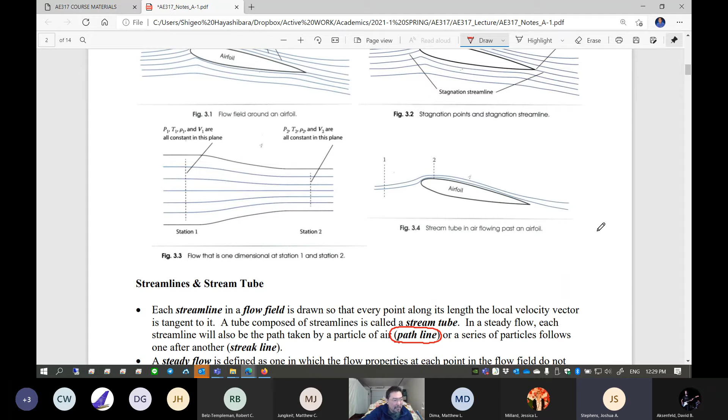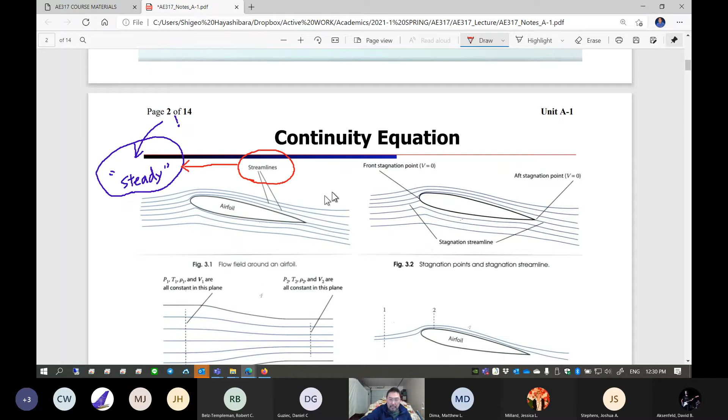A streamline is tangent to the flow field. Physically speaking, that's correct. So this is—I hope you're not looking at the notes. Okay, where is it? Did I say that? Tangent.

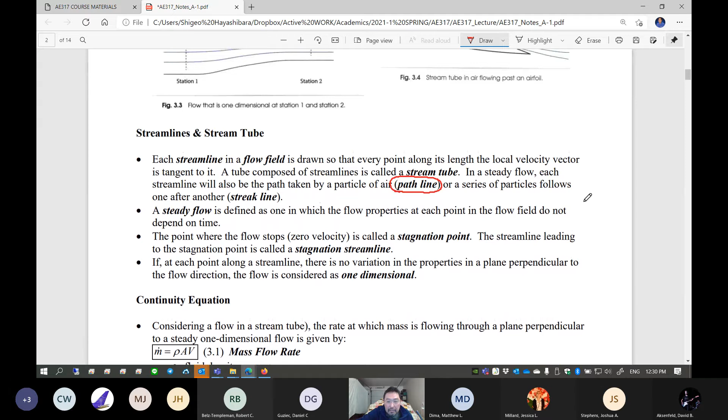Is the note saying something like that? I don't know, anyway—first bullet point. At every point along its length, the local velocity vector is tangent to it. What does that mean? That means if you choose this path, at any location, the velocity direction is tangent to the path. I don't know the magnitude, but I know at least the direction of the velocity, which is tangent to the path. That's a very good definition, physically speaking.

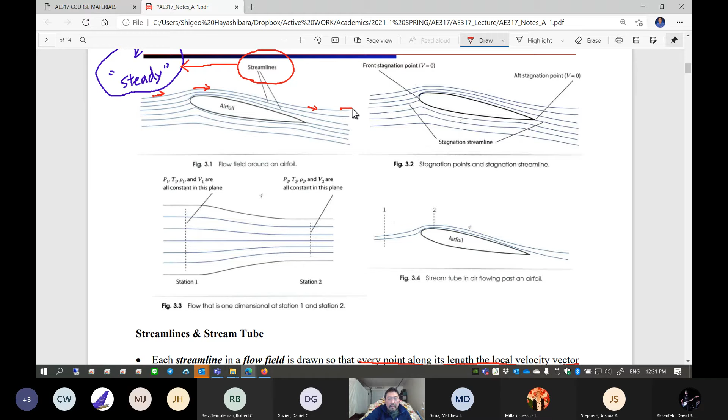Also, another definition is quite important. I'm going to change the color here. It is a—streamline is what? Streamline is, okay, it's not saying... streamline is actually a purely mathematical concept.

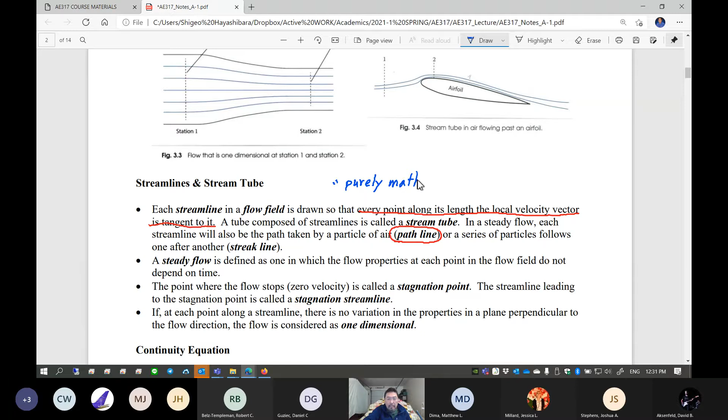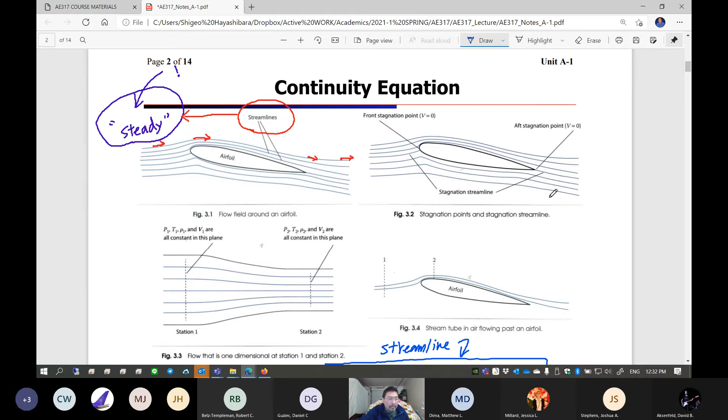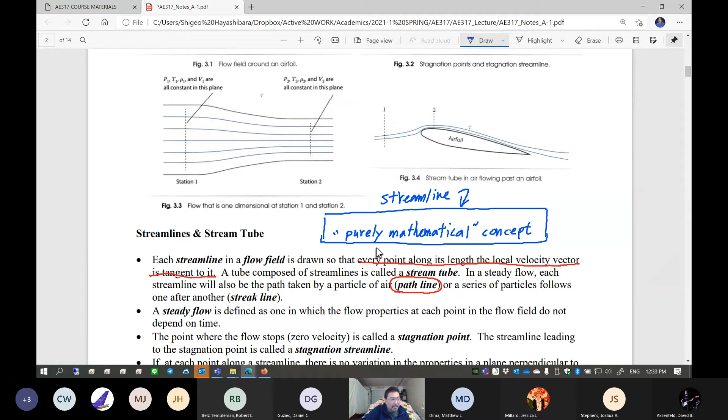This is actually the most important out of all the definitions—that's the streamline. So streamline is actually... you can basically say that it's physical. In other words, you can visualize the flow field because this is the line specifying the tangential direction of the velocity field present in the flow field. You can also visualize it by injecting smoke particles into the flow field—that particle takes a path, which is called the path line. If you continuously inject particles at the same location, the numbers of particles following one after another create a streak, called the streak line—that's essentially a smoke wind tunnel. So it's a flow visualization, something physical, but at the same time purely mathematical. That's why you can now develop an equation for a flow field. Without this streamline concept, you'd have zero equations available for fluid mechanics. In other words, wind tunnels and flow visualization were the only way to analyze flow fields back in the day. So you have to realize the importance of the mathematical nature of the streamline concept.

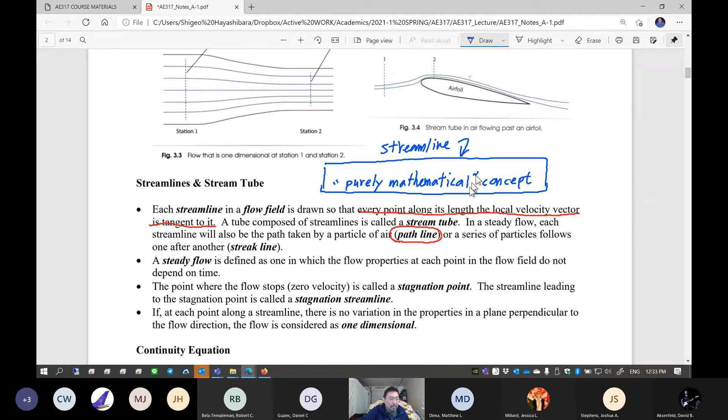Having said that, did I mention streak line? Streak line is essentially... a path line is a single particle's path. Streak line is this path of multiple particles released at the same location, one particle following one after another, ended up having a line over a streak. I'm using the digital ink - this is a streak of small tiny dots, but it looks like a continuous line. It's called streak line, a streak of ink, for example.

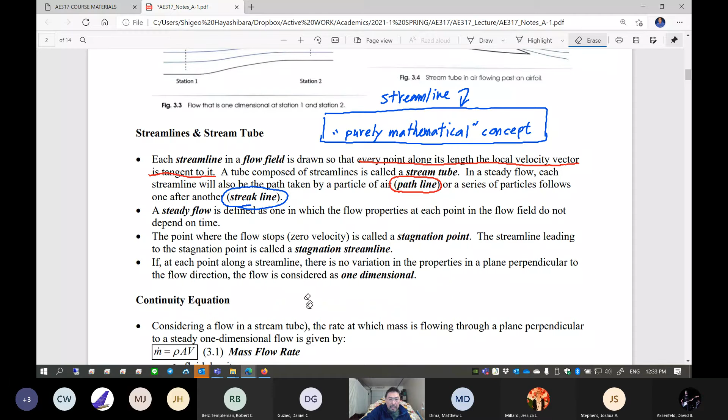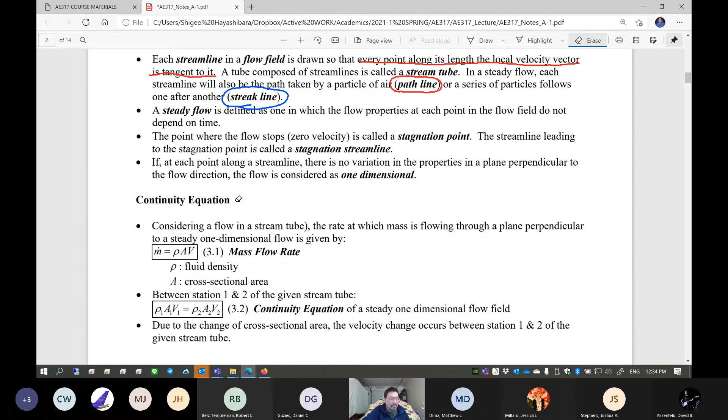Now, because of... well, thank God we have streamline. That's why we can apply equation. Okay, so let's move on.

So there are a few equations we developed back in old days fluid mechanics. One of them is continuity equation, coming all the way from conservation of mass. Do you remember the original governing equation? Conservation of mass. So just because continuity equation is given here, this is not the governing equation. This is like a simplified equation coming all the way from the governing equation of conservation of mass.

So you had to apply tons of assumptions or simplification constraints to simplify the equation. This is something called the continuity equation. But if you pick it up as is and plug and chug, sometimes you are in big trouble, because this equation is so specific - there are lots of constraints attached to it. So could somebody actually point out, okay, where is this equation coming from?

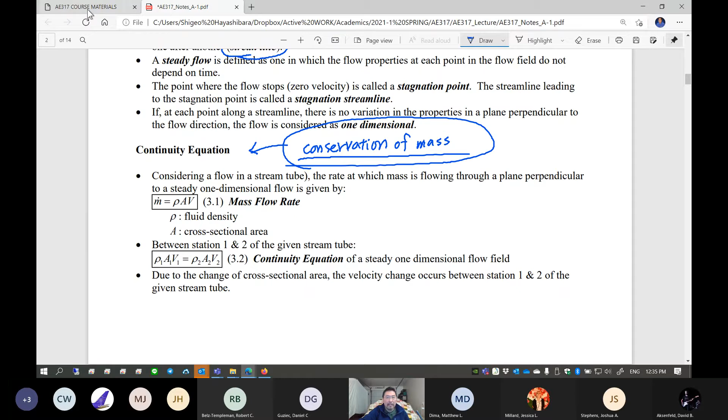Let's go back to the home page. This is AE317 course materials. Oftentimes you probably want to go back to either fluid mechanics or aerodynamics. So now my question is, where did you get this equation? Somebody please - Reynolds transport theorem. Okay, so which one?

Let's take a look at somewhere. So you want to go all the way back to fluids, or you want to take a look at the aero notes - either way is fine. I think it was unit D of fluid or unit A of aero, either way it's the same thing. But let's take a look at aero unit A3.

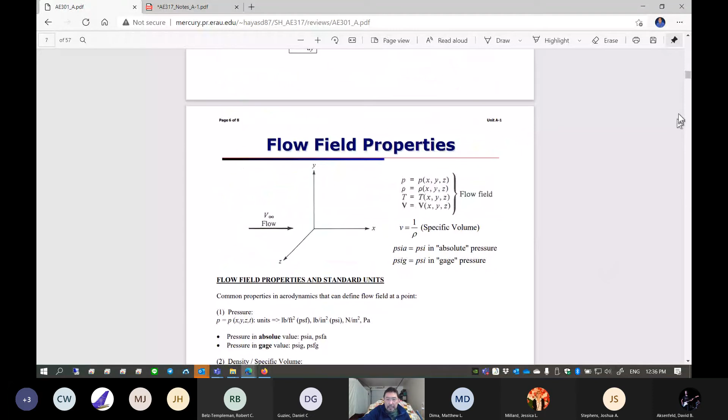Especially for those who didn't take my aero class, this is a good time to look at where you can find stuff in aerodynamics notes. So if you go back to aerodynamics note unit A3, this is the continuity principle, page 1 of unit A3 note, continuity principle.

Take a close look at it. This is the original governing equation of fluid mechanics. This is the same equation, just a different style. This is the Munson, Young, Okiishi, Iowa State University mechanical professor style of equation. This is the John D. Anderson, professor of University of Maryland style of equation.

By the way, Professor John D. Anderson is a god of aerodynamics. No one can go against him. He's the one who pretty much makes the rules of aerodynamics in this country. So this is the governing equation, continuity.

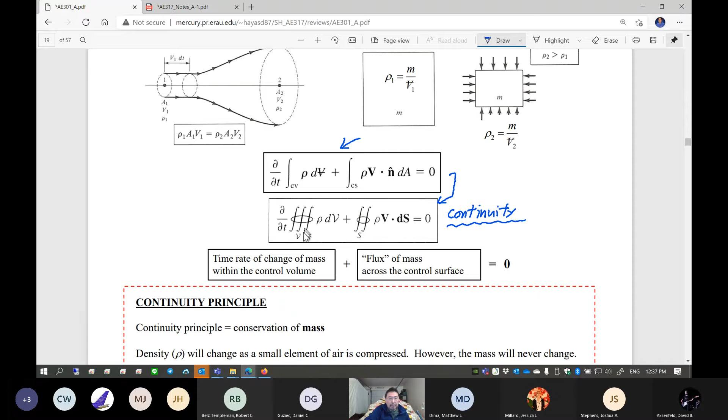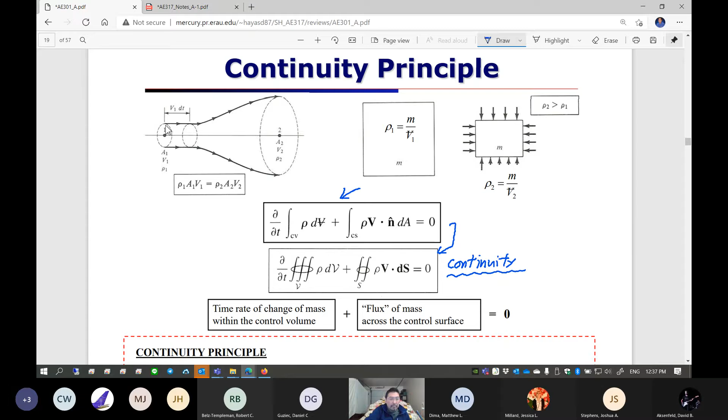So this governing equation basically includes everything. This portion is the time rate of change of mass within the control volume, if you define the control volume in the flow field - let's say if this is a control volume. If you define the control volume, you're going to define a control surface, the surface where you allow fluid flow through it. In this case, control surface, 2 of them.

So that is actually the right-hand side - this is how much flux of mass flows through those 2 control surfaces. Those 2 added together must be equal to 0, called the continuity principle or governing equation of continuity. Do you remember those things? I hope so. Let's just go back here. So how did you get this equation?

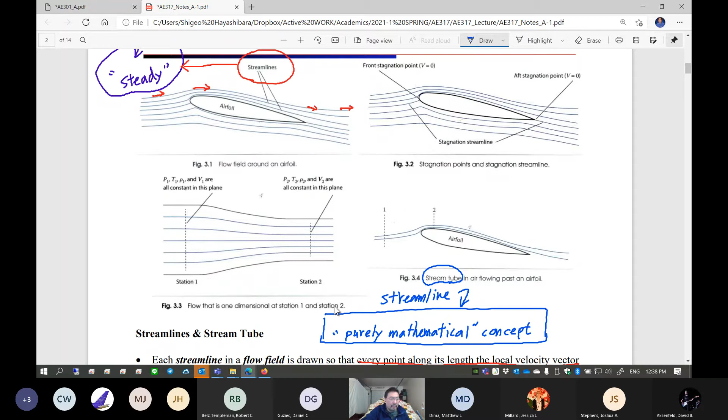That's important. You are going to basically define a streamline in the flow field, just like that. Then at the same time you can actually create a tube using streamline, it's called a stream tube - a tube created by streamline. Similar to this thing, this is a stream tube, a tube created by streamline.

So because of the definition of the streamline, velocity is always tangent to the line called streamline, so there's no flow going across it. This is like a solid wall, acting like a solid wall - there's no flow going across it. The only surfaces that actually allow the flow to come in and go out are those control surfaces.

Now you are going to apply the equation here, then come up with that equation of continuity. So what are those assumptions? We have to probably list all of those assumptions for this equation. So what is the very first assumption for this equation, coming all the way from the conservation of mass governing equation?

Steady flow - yes, exactly, that's what I wanted to hear. Second assumption. By the way, steady flow is completely dropping off this term, right?

This is zero steady. Okay, so what's next? Incompressible - incompressible is not in here actually. Inviscid, incompressible, a little too fast, a little too early. It's gonna show up, but not here.

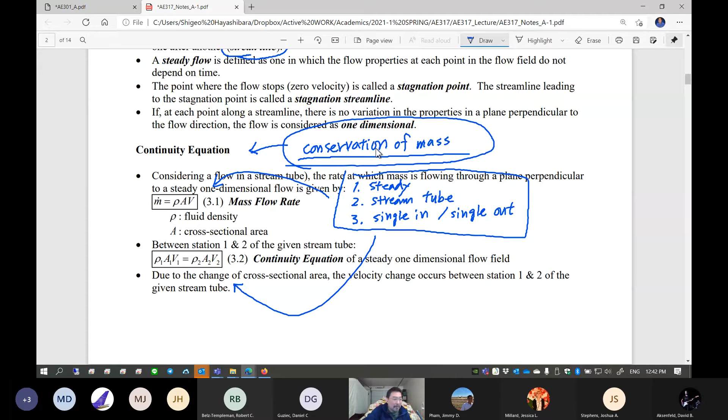So let's take a look at the very simple exercise here, okay? You're gonna probably rough it out, but here's the catch. I'm planning the very first quiz, not the homework. Homework is gonna come up later, but I'm thinking of the very first quiz, just the very first stumbling block to challenge you off of this example problem. So just pay attention.

And also, I hope you have a calculator because I don't want to calculate by myself. So I'm going to wait until your calculation result. Okay, so example A-1-1, next page.

Okay, so this is again stream tube, and let's assume this is something called one-dimensional flow. One-dimensional stream tube means that across this station one cross section, pressure, temperature, density, and velocity are all constant across this cross section station one - that's called 1D. And also pressure, temperature, density, and velocity are all constant across this section two, cross section here, it's 1D. So this is one-dimensional stream tube.

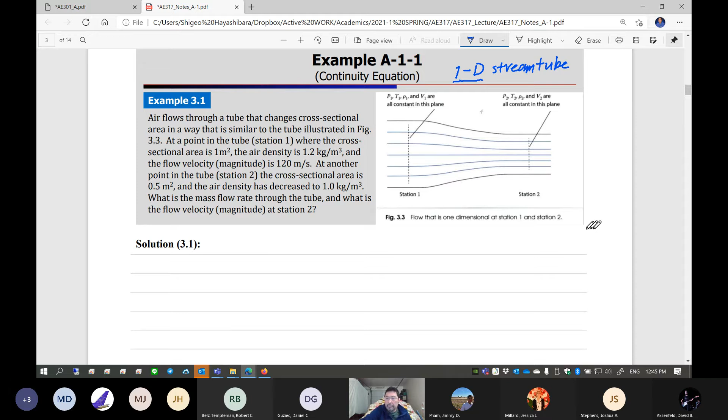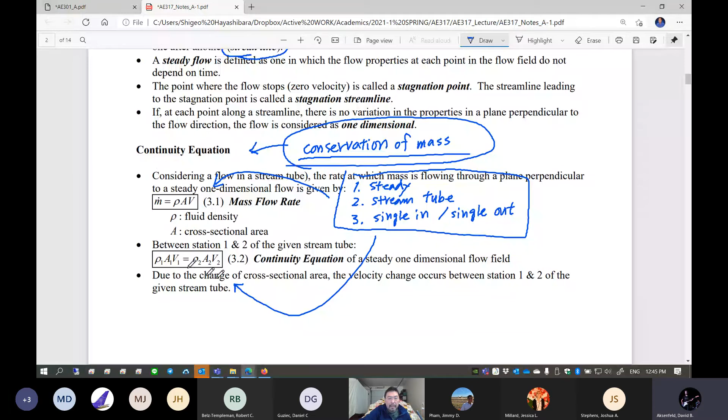Let's just take a look at it. So what equation do you want to pick? Continuity - which one? Equation 3.2. 3.2. Okay, let's pick up equation 3.2.

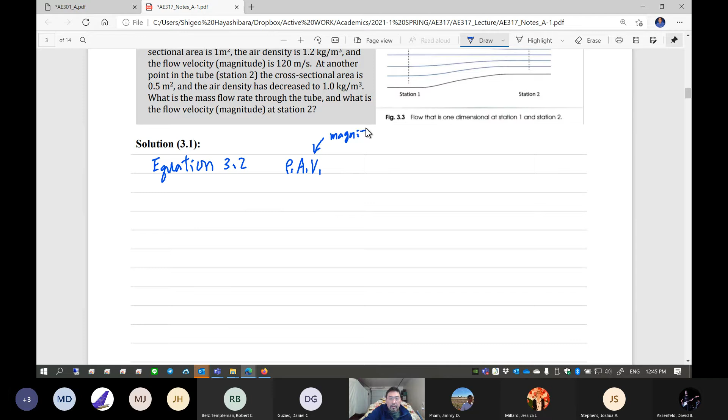So equation 3.2 basically says rho 1, A1, V1 - by the way, V1 this is magnitude, okay? Let me zoom in a little bit more. So density, cross-section area, velocity at station 1 multiplied together, this is actually mass flow rate.

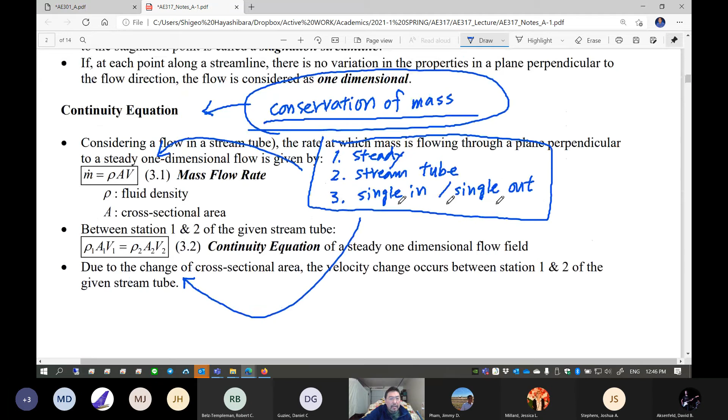Mass flow rate never changes between station 1 and 2 - that's what equation 3.1 says. Equation 3.1 says mass flow rate is constant. So if you apply it between station 1 and 2, this is equation 3.2: rho 1 A1 V1 is equal to rho 2 A2 V2. Once again, velocity magnitude V1 and V2.

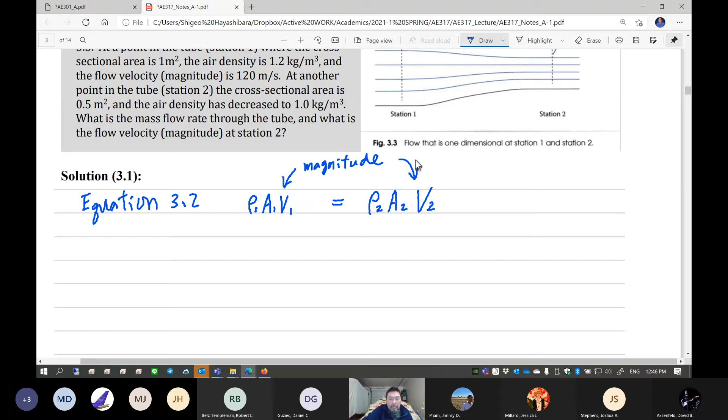So what do we know? Rho 1, density 1, is 1.2 kilogram per cubic meter. Cross-section area A1 is 1 meter square. Velocity V1 - what is velocity V1? Do we know that? 120? Oh, okay.

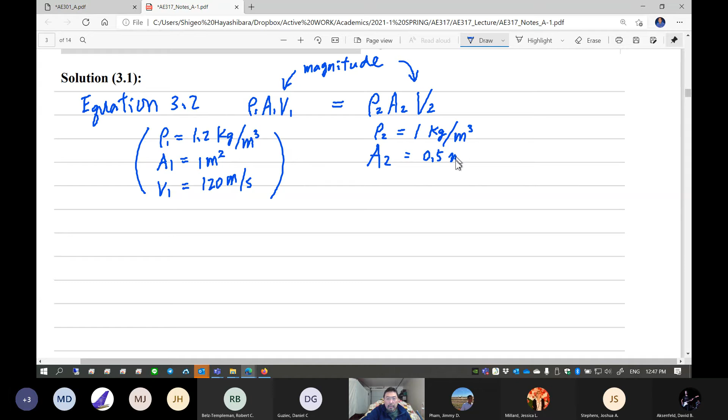Density rho 2 is given as 1 kilogram per cubic meter. Cross-section area A2 is 0.5. V2, what is it?

So obviously you're going to apply this. First of all, let's find out the mass flow rate, which must be constant.

Which means m-dot 1, which is rho 1 A1 V1. M-dot 2, the mass flow rate, is rho 2 A2 V2. So basically equation 3.2 says mass flow rate M1 and mass flow rate M2 are essentially the same thing.

So you can either use the condition of station 1 or condition of station 2 to determine mass flow rate first. Let's use the condition for station 1. So using condition of station 1, mass flow rate m-dot is rho 1 is...

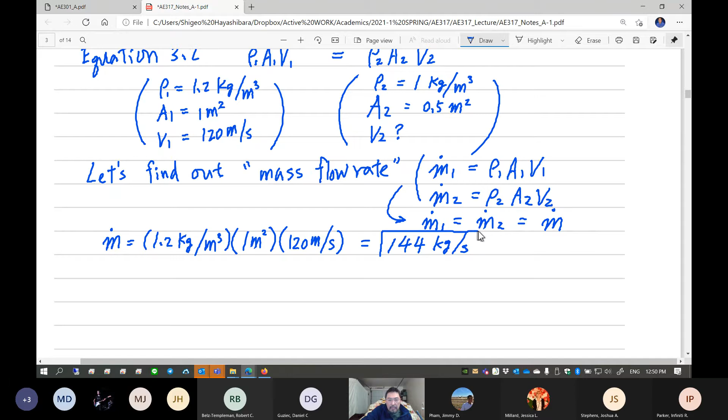So what's the unit? Kilograms per second. That's right. So how much mass is flowing for a given time. So this is the mass flow rate, which is constant between station 1 and station 2.

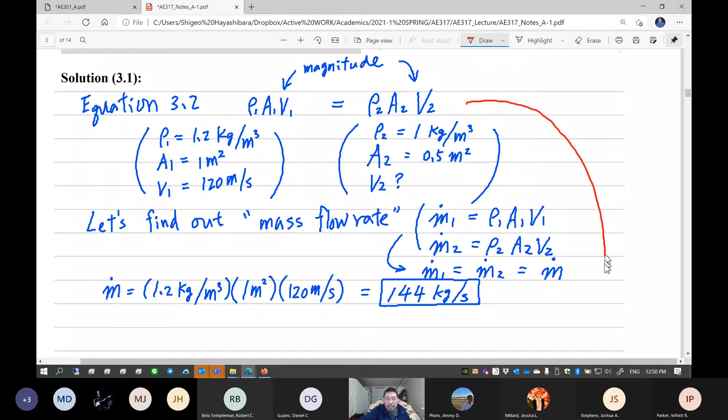Second question, what is the velocity V2? Obviously you're going to pick up the equation from here, then apply it. So...

V2 is equal to V1 multiplied by the ratio of the density, rho 1 over rho 2, multiplied by the ratio of the cross-section area, A1 over A2.

So if V1 is 120 meter per second, density is... wait a minute, that's a dumb thing to do. Let's not do this. Okay, that's a pretty dumb thing to do. So this is, by the way...

rho 1, A1, V1 divided by rho 2, A2. Since the numerator is essentially m-dot, right? So let's use the value here.

So I'm going to pick up this value and plug it right in here, 144 kilogram per second. And density rho 2 is given as 1 kilogram per cubic meter, multiplied by the cross-section area, 0.5 meter square. What is V2?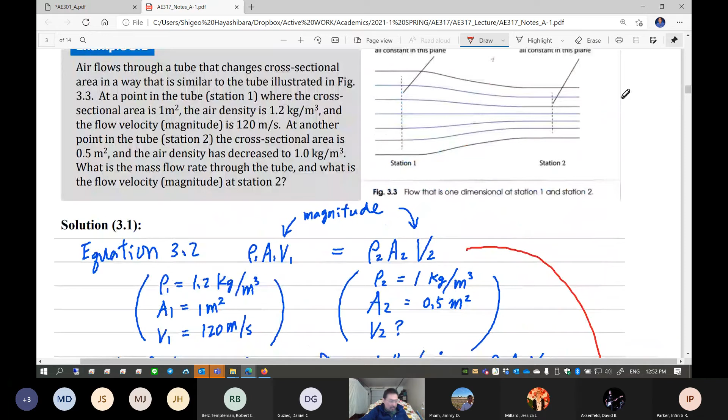Okay, let me just save this for a moment. So this is example A11, right? Are you happy? How's your response? Well, wait a minute, Dr. H, you're joking, this is a piece of cake, way too easy. Is that how you're feeling?

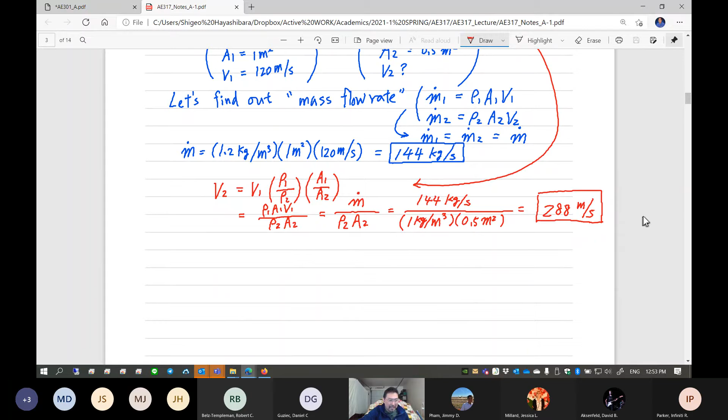Yeah, so I'll give you quiz 1, released probably today, maybe tomorrow, I don't know. As soon as I'm ready I'm going to release quiz 1, which is take-home. It requires this information, okay, and then it's going to make you think. If you're fundamentally doing the wrong thing, I will viciously grade. So keep that in mind.

In other words, this is a challenge for you. Do you really understand the meaning of the equation? Meaning of equation is what's the origin of each equation, where does that come from?

Now the origin of the equation is typically this kind of equation. Where is it? There. This kind of equation is the origin. What kind of equation is that? This is the integral form of the differential equation. In other words, you come up with this equation by integrating the differential form of the equation given. That's the origin of almost always the conservation of mass, momentum, and energy type equations in aero and fluid mechanics — they all originate from differential equations.

Think about it — we are dealing with small tiny particles of air and fluid always. If you try to develop an equation applied to that small tiny particle, each one is governed by a differential equation. Now if you want to come up with the overall behavior by defining a control volume in space, like in this case, the nature of your equation is going to be an integral equation, right? So that's the origin.

And then you further simplify, you come up with the equation you can pick up and plug and chug. Now sometimes people just pick up this equation casually and plug and chug without thinking through that process. The process actually starts all the way from this governing equation. Skipping that process and just picking up and plugging and chugging is a big no-no in fluid and aero.

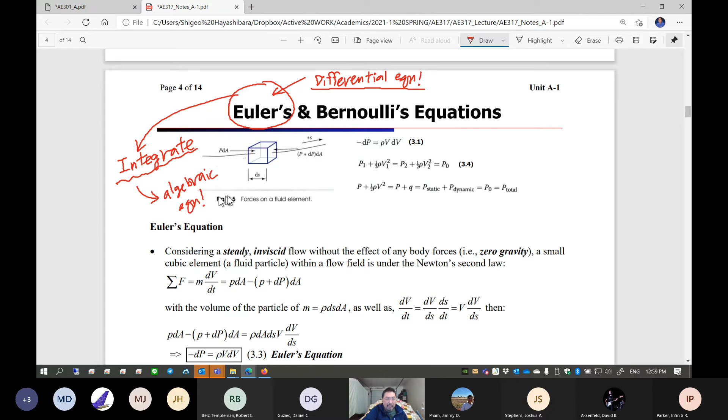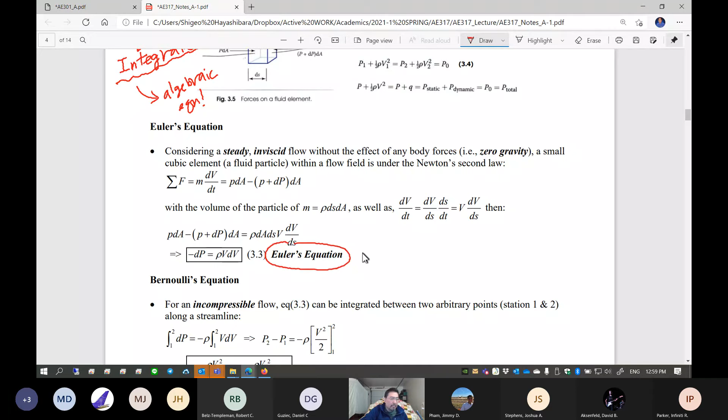So let's just remember, in aerodynamics, we derived Euler's equation, and also back in fluid mechanics days, we did the same thing. But Euler's equation in aerodynamics, we picked up a single particle, which happened to be a cubic element, a small, tiny portion of air, moving steadily along this path called the streamline. Like I said, streamline is a pure mathematical concept, so that actually helps. You're going to apply some principle, conservation, blah blah blah, to this particle to come up with Euler's equation. What did you apply? What kind of concept or law did you use to get Euler's equation? Anybody? Please jump right in.

In other words, what's the overall source or origin of Euler's equation? Where does that come from? Would that be conservation of energy, sir? No, Newton's second law. Newton's second law is correct, but is that the conservation of what? Not energy. Momentum, then? Momentum. Yeah, that's right, that's right. Conservation of momentum, the Newton's second law of motion, aka

in a nutshell, is F equal to ma, right? This is Newton's second law of motion, conservation of linear momentum. Okay, so this is the only equation you learned from dynamics. Dr. Wald's dynamics surprisingly teaches only one thing: F equal to ma. That's it. That's conservation of linear momentum. So you apply this to a single particle moving along this streamline, then you come up with Euler's equation.

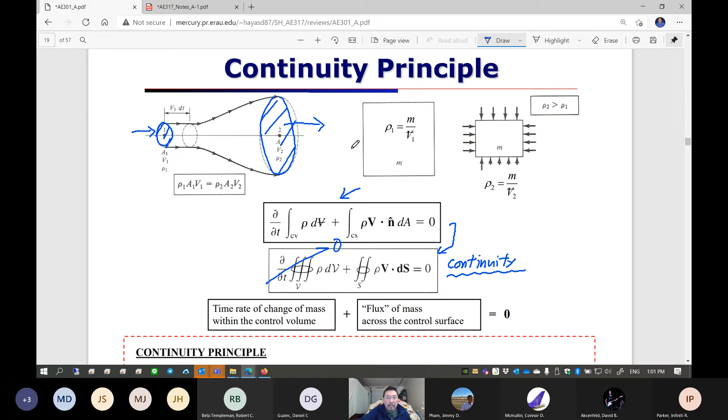Euler's equation is an ordinary differential equation which is independent to x, y, and z. Ordinary means that this equation depends only on the direction tangent to the path called the streamline. Now, if you want to apply Euler's equation in Cartesian x, y, and z, what kind of equation would you end up having? It's one of those homework assignments in aerodynamics. Do you remember those?

Okay, give me three. Give me Euler's equation in x, y, z. This is Euler's equation along a streamline, direction tangent to the path. So how about Euler's? Somebody please jump right in. Euler's in x, y, z Cartesian coordinate system.

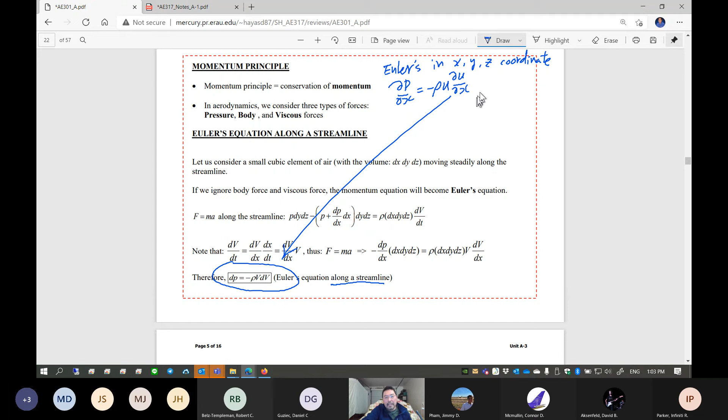Do you remember that? For x, it would be dp over dx is equal to negative rho times u times du dx. This is x direction. Y direction is dp dy is negative rho v dv dy. Z direction is dp dz is negative rho w dw dz.

Remember, velocity is a vector. X direction component u, y direction component v, z direction component w. So this is the definition of velocity as a vector, and then in each direction x, y, z, you can define Euler's equation. Now you can notice this is a partial derivative, right?

Partial derivative. This is ordinary derivative. Why is that? You have to understand those concepts. If you don't know those concepts, every single detail doesn't matter. If you understand the concept, every single small detail you can pick up anytime. That's the value of education. Don't miss those things. As you take this class, aero class, fluid mechanics, don't miss those important concepts. Otherwise you're wasting everything down the drain. You're paying a lot of money to come to this school.

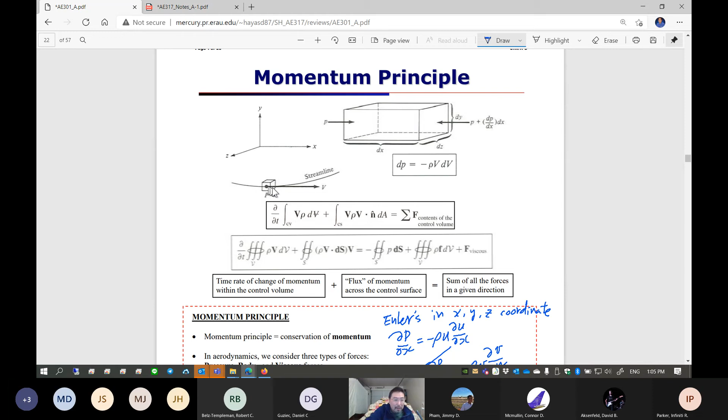Don't miss those. So a partial derivative means that, in the 3D Cartesian space, pressure and velocity depend on the direction. So only the component in x direction is going to be differentiated. But this is the case that equation developed along this special case. In other words, this particle is moving along this path. Thank God we defined the streamline because this is a steady flow. Velocity is always in the tangential direction. So this is a pressure change, and then velocity change in tangential direction only. That's why we can handle this as an ordinary derivative. In other words, velocity and pressure only change in the direction tangent to the path. So that's why this is simplified. Well, I would say generic Euler's equation.

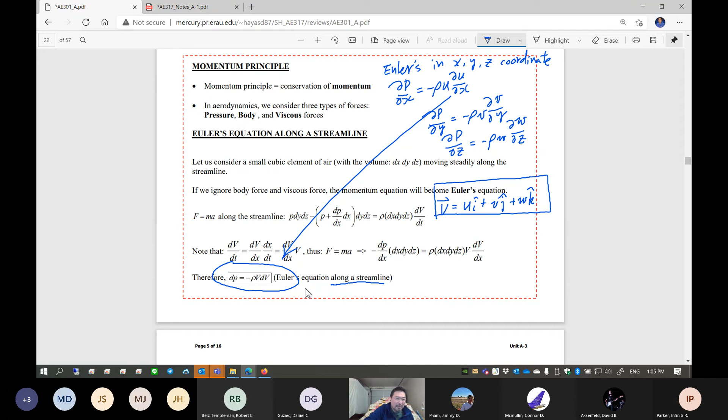You can apply this as long as you define a streamline in the flow field. So don't miss those important concepts. So this is Euler's equation you developed in aerodynamics. Do you remember that? I hope so. Again, this equation is constrained. What's the constraint? You have to have a streamline. So when you apply this equation, you need to show me always which streamline you are applying this equation with. Otherwise I'm not going to give you any much partial credit because you don't know what you're doing. So this equation is constrained. Application-wise, you have to show the streamline, exactly which streamline you are applying this equation with.

Having said that, do you remember Bernoulli's equation? How did you get that in there? How did you get that from Euler's? All you have to do is integrate both sides. Yeah, integration is taking place. Now, in order to integrate, of course you're going to develop a streamline. And then along the path of the streamline, this is location 1, this is location 2. You're going to integrate between location 1 and location 2, this equation.

Here we go, that's what we're doing here. So this is a streamline. So those two points, 1 and 2, need to belong to the same streamline. Otherwise you can never use this Bernoulli's equation. Be careful.

So suppose this is a flow field, cross section of a wing. This is a flow. This is location 1, this is location 2, this is location 3. So Bernoulli's equation is correct because location 1 and 2 belong to the same streamline, but can you do this kind of thing? P1 plus 1/2 rho v1 squared is actually equal to also P3 plus 1/2 rho v3 squared. Can you do this? No. What's the problem? Something's completely missing.

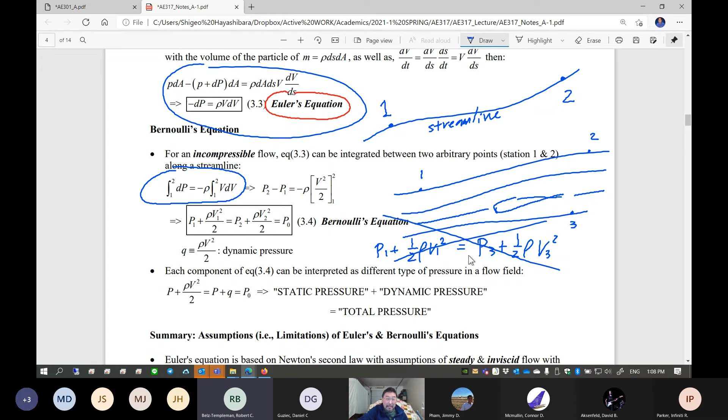Suppose if you add one more assumption for this Bernoulli's equation, you can actually do this. What is that one more assumption? Do you remember that from Aero? If all your streamlines come from the same point out at infinity, then you can do that. That's one thing. So in other words, it's kind of hard to illustrate, but suppose, okay, that's one thing.

Suppose if this is the streamline, in other words it's originated from free stream. Free stream, you know what is the free stream? Free stream is the term developed in wind tunnel testing. So here is infinity, free stream. And let's say this is location 1, location 2, location 3. Oh, no, you still can't do this. But between infinity to 1, between infinity to 3, infinity is infinity. So you can apply Bernoulli. But not directly 1 to 3.

Also, another thing is, do you remember the irrotational flow field? Del cross v is 0. If the flow field is irrotational, completely irrotational, which is ideal flow, you can do this. Do you remember that? I made you do flow over a circular cylinder in aerodynamics, right? That's an irrotational flow field.

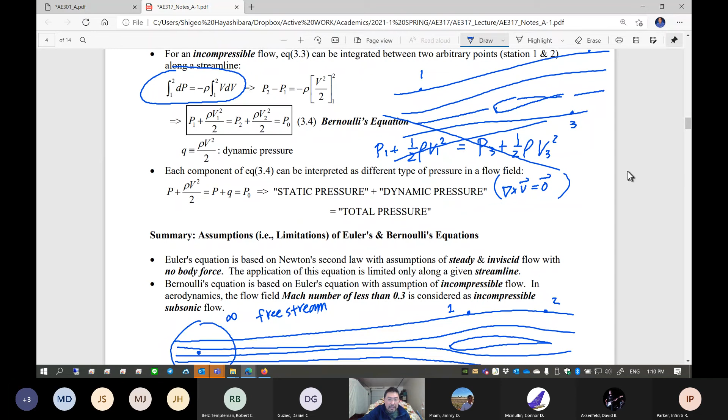Just about anywhere in the flow field, this equation applies—that's irrotational flow field. So those are the things that you really need to go back to in aerodynamics. Just don't forget the core concept.

So before you go, before I develop a quiz 1 problem, my avatar Ernie shows up. This is not me, okay? This is my avatar.

Okay, 5 more minutes. Ernie thinks—okay, it's not me saying it, it's Ernie, my avatar, who says it. Trust him, or don't trust him, it's up to you. Do you trust him? I don't know. Ernie thinks, okay.

I can determine P2 if P1 is given.

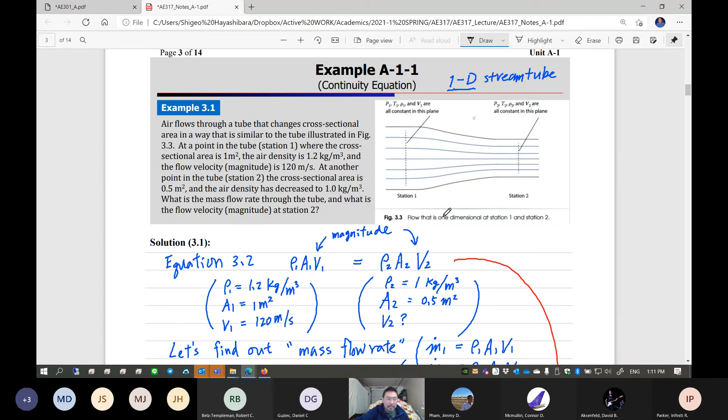Let's go back once again to this example A11 before you go today. This is going to be like I'm going to create quiz 1, okay? So in example A11, we spent some time today in class. We applied the conservation of mass, or continuity principle, to determine two things: one is the mass flow rate, the other is the velocity at station 2.

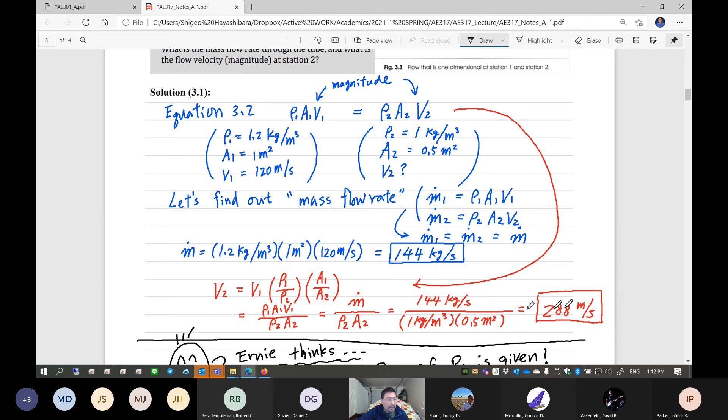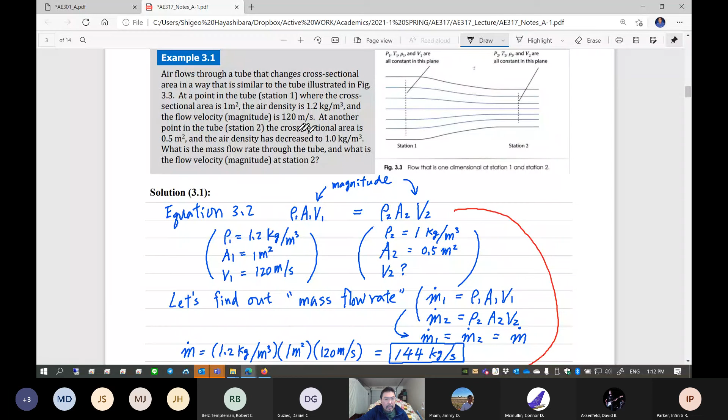So now we know velocity at station 1 is 120 meters per second. Velocity at station 2 is 288 meters per second—it's fairly accelerated, okay? And we are given density at station 1 at 1.2 kilogram per cubic meter, and density at station 2 is 1 kilogram per cubic meter.

Now Ernie thinks: if P1 is 1 ATM, standard sea level, you guys know that—it's 101 kilopascal, or 14.7 psi, either way. If P1 is 1 ATM, what's P2? Then Ernie thinks...

Well, P1 plus 1/2 rho 1 V1 squared is equal to P2 plus 1/2 rho 2 V2 squared. So what the heck is P2? P2 is equal to P1 plus 1/2 rho 1 V1 squared minus 1/2 rho 2 V2 squared. So if you plug in 101—Ernie is careful, this is unit Newton per square meter.

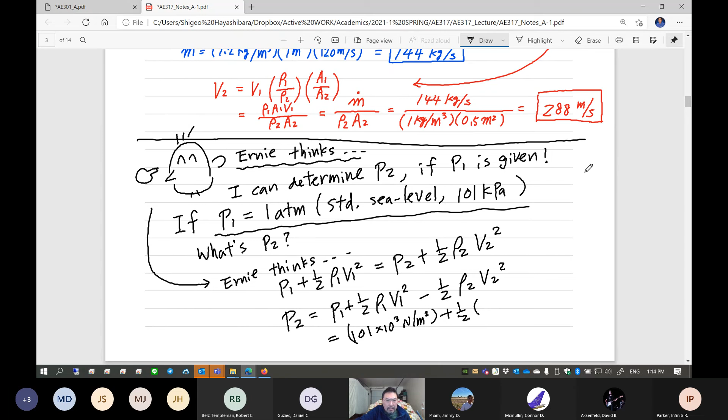101 kilopascal plus 1/2 times rho 1—what's rho 1? Rho 1 is 1.2 kilogram per cubic meter. V1 is 120 meters per second, this squared—Ernie must be very careful. Minus 1 kilogram, V2 is 288, that's what we got—288 meters per second. Okay, that's right, so that's what it is.

Kilopascal. What do you think? That's what Ernie says, not Dr. H. Do you agree? No. Why not? You forgot to check incompressible flow.

So Dr. H is going to announce quiz 1. It's basically this question, okay? Let's find out pressure P2 if P1 is 1 ATM. That's going to be quiz 1. I hope you can handle it. Ernie did it this way—Ernie bird did it this way. You can trust it or you can disagree, either way. Okay, so any other question here?